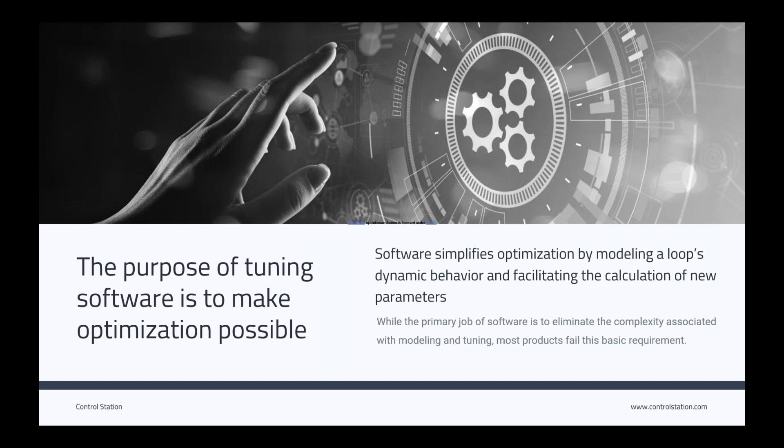Sure, Dennis. Morning, everybody. So I'm Brett Beauregard, I'm the Director of Product Development, and as Dennis said, I spend a lot of time working on steady state versus non-steady state and trying to make our products really be able to handle the difference.

So when we talk about steady state, mostly we're talking about what you would think of, right? We're talking about a calm ocean. Everything's moving comfortably and steadily, no major variations, maybe a few ripples here and there, but everything is calm. So the controller output is calm, the controller input is calm. We're not seeing any major upsets and things like that. There's an added stipulation, or an added kind of wrinkle that comes when we're talking about process dynamics.

So when we're modeling dynamics, changes, deviations from the norm, and things like that - one of the things that kind of misses sometimes, or one of the things that we include in our definition of steady state, is that we don't want to see changes in dynamics. So you were thinking of a calm ocean, but if you have something like a tank level that is steadily rising continuously, we would classify that as dynamically steady. That is a steady condition.

Everything is at equilibrium and calm. There's nothing different happening, knocking you around. That is a steady process dynamically.

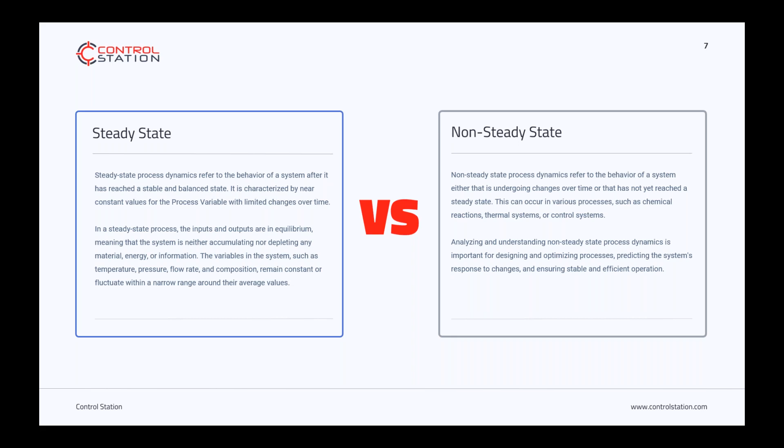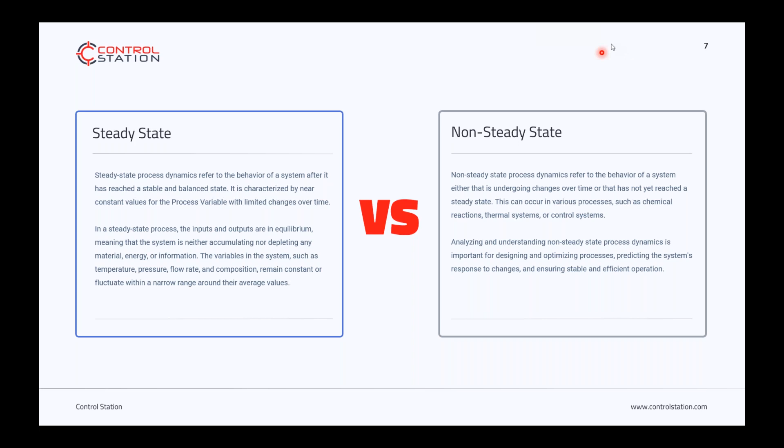Now, if you contrast that with non-steady state, also familiar to most people, here we're talking about a process undergoing a variety of changes. So it's not a calm ocean, it might be a storm. We have ripples occurring due to external impacts that are coming and changing us. We have ripples occurring due to set point changes and things where we've changed. We have ripples occurring due to load changes, and maybe even mechanical issues and things of that nature that are all causing our process to not be steady.

So when we say steady state or non-steady state, these are the differences, right? We're talking about a calm process dynamically, or a process that's got some motion into it. That's the difference we're trying to highlight when we're talking about these things in this presentation.

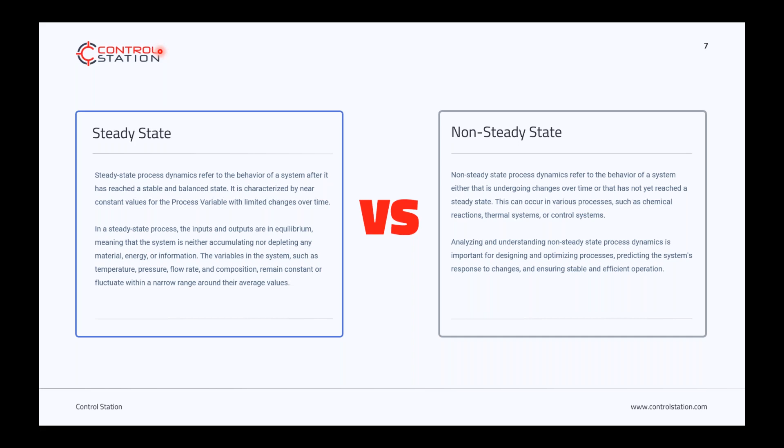Thanks, Brett. So as Brett just noted, today's webinar will focus on a common failing of controller tuning software products. We've entitled today's session Hijacked, as certain software vendors claim the ability to accurately model non-steady state process conditions. Their use of non-steady state as a feature only applies in the simplest of applications. To be blunt, their claim is intellectually dishonest. Most software packages fail to model and tune complex process conditions, what today's audience knows as the real world.

So how can practitioners in plant management determine if a tuning package is truly capable of handling those real world conditions? How do you know if an investment in software will provide the necessary value? How can you be sure that you too aren't being hijacked? Today we'll explore 3 separate questions or scenarios that provide clarification.

Our first question relates to integrating loops. These loops are exceptionally commonplace in industrial applications. Think of level control as an example, one that Brett mentioned earlier in his remarks. As it relates to non-steady state modeling, it's essential to know if the software can accurately model such a basic process using closed loop data.

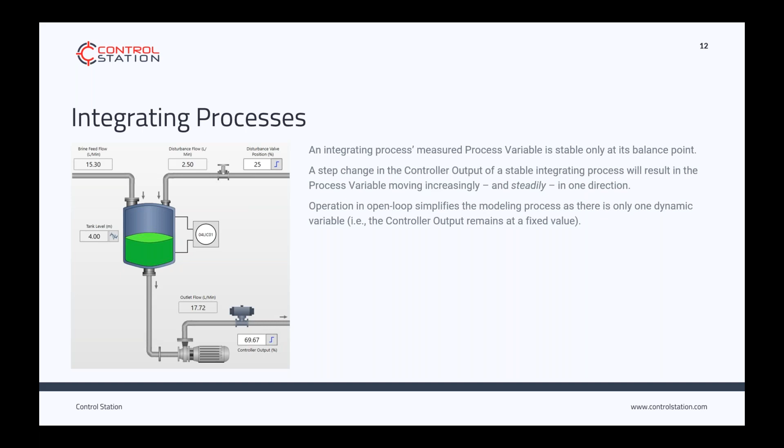So as an example here, if we move, we have one balance point where the flows are equal, but then if I increase the output, it may drain to the bottom, or if I decrease the output, it may raise to the top. So this, at first blush, and by a simple definition, you might consider this to not be steady state. This is kind of descent into zero. But here we have what I would consider, and by our definition, two different steady states where we have two dynamically steady points.

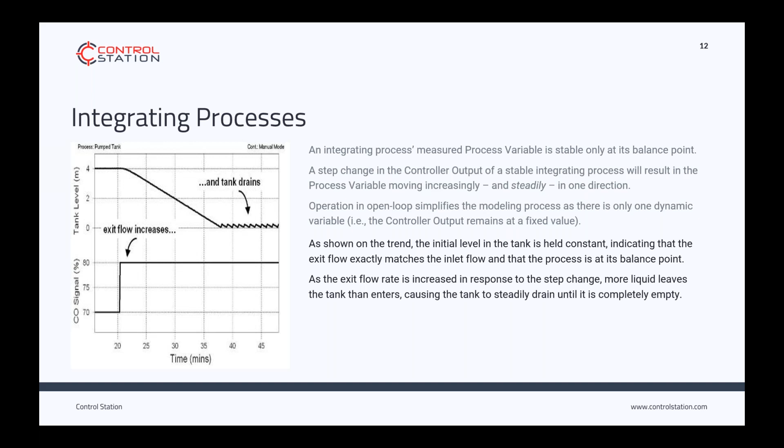I guess there's a third one at the end where we are steadily cavitating the pump for seven minutes, so hopefully the operator is getting disciplined for that. But this is an example of an integrating process.

So this is what some vendors would consider a non-steady state model, modeling this data. This is non-steady state data according to some vendors. And based on what we talked about a little earlier, I don't think we could say that this is a stormy ocean. This is a very calm sea, and we're just going in two different directions.

So dynamically, when we're talking about process dynamics, which is what we talk about when we're talking about process control, we have one steady state, another steady state, and you're doing the modeling of these behaviors. So this is a test and also an example of an integrating process. This is what some vendors would classify as a non-steady state test.

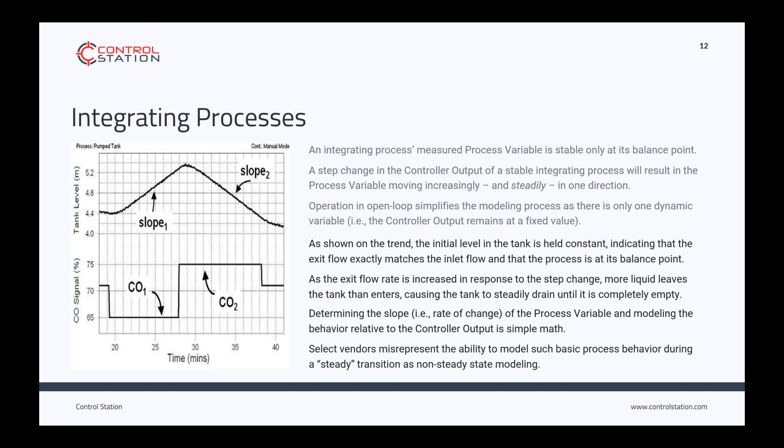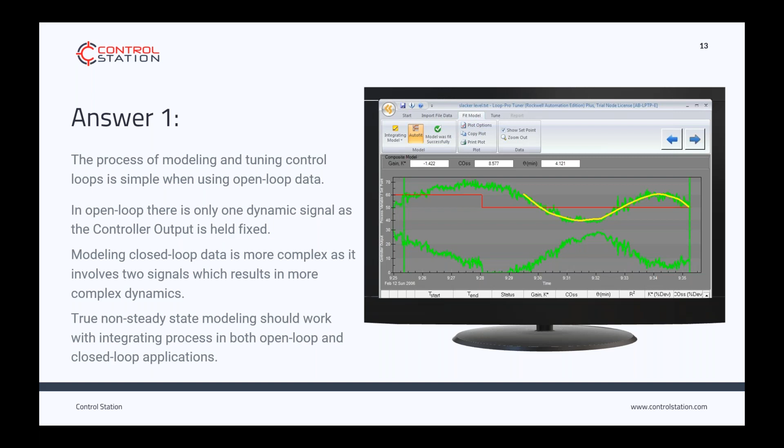So this is the first question, right? And this is the answer. Can your software model this closed loop integrating data? My guess would be that the answer is no, unless of course you're using our software already.

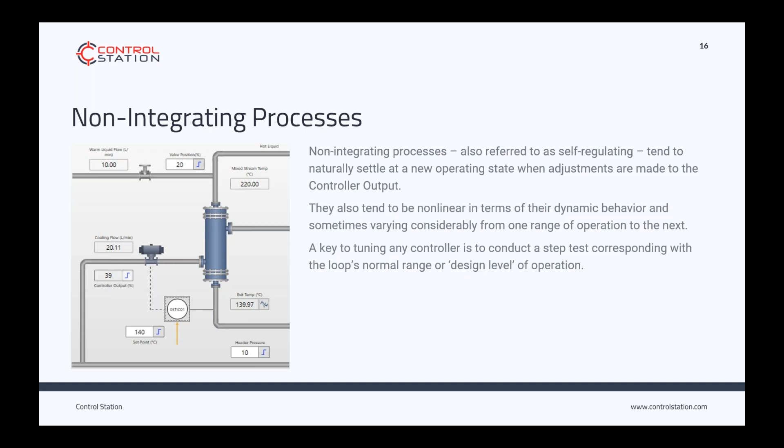So a heat exchanger is one example of this type of process, but it could also be a flow or most pressures. Even if you think of your car, it behaves in this way, right? We change the gas pedal angle and it changes. So this is probably the most simple test that you can perform.

So we have an open loop test. There's no controller in this. We make a step. We go from one steady state to another.

Most software products require that at least some of these conditions are met. So some of your lower end soft tuning packages will require that you can never be in automatic mode — you have to be in manual. Some require that you have to start and end at steady state, but also most importantly, all of them, other than the one that we're talking about here, ours, require that you start at steady state. So starting at steady state is a requirement of most software packages.

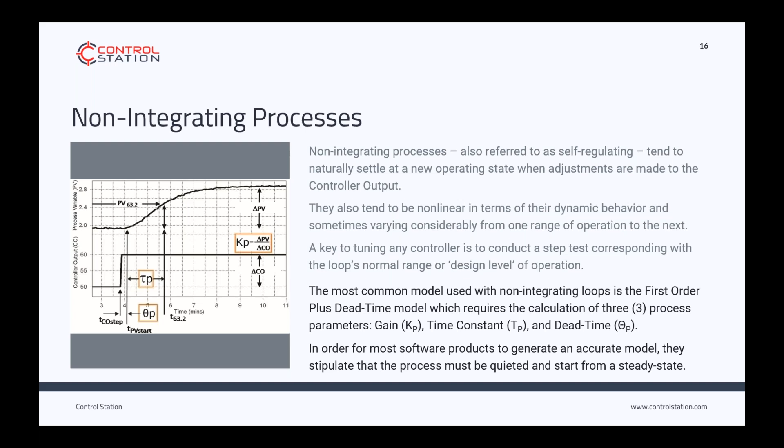By not requiring that the loop achieve a steady state before you do your test, it's much more likely that you will be able to do a test. Right? The joke is, if I could get it to steady state, I probably wouldn't need to tune it. That isn't always true, but that's the idea — okay, let's tune this loop, first thing we have to do is get it perfectly flat, and then we can start our test. That may be realistic in some cases, but it's much nicer if you can just say, all right, wherever the loop is right now, we can do a set point change. There's our data. Right? So there's many more opportunities for finding good data.

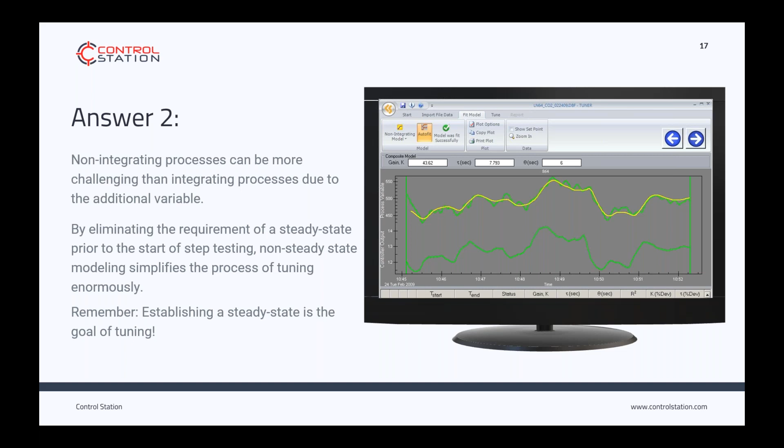Great input there, Brett. Which brings us to our third question. As shared at the beginning of today's session, oscillatory, noisy conditions are indeed the real world. Learning if a vendor's product can handle these commonplace conditions reveals the software's true worth.

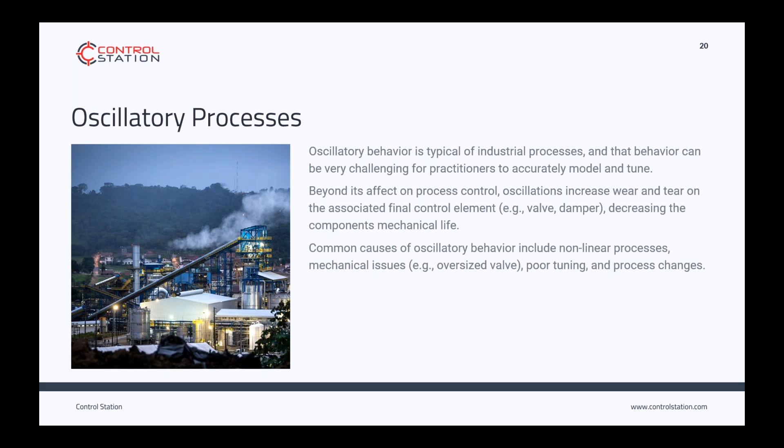But the fact of the matter is you really want to address these things, because unless, in the very, very rare case that they're related to the process itself, there are a few processes that actually require these dynamic changes, but almost always it's just a problem. It's increasing wear and tear on your equipment, causing variability in final product and things like that. So it's almost always something you want to get rid of.

And this is a challenge to tune. As I said, finding a good test is nearly impossible in automatic mode, and putting it in manual mode is not an option.

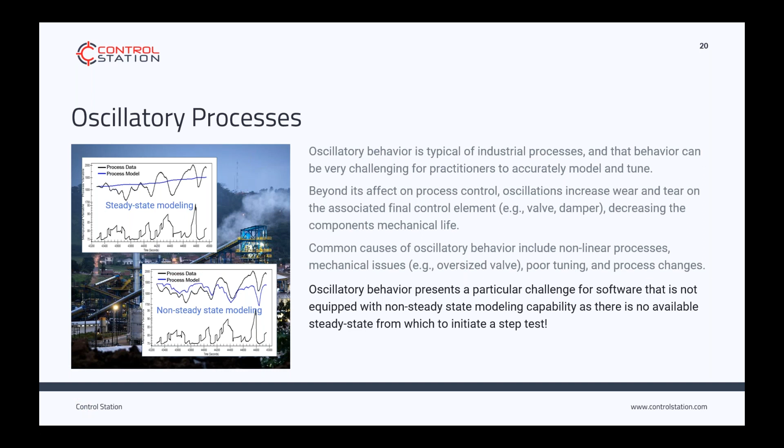Okay, so that's a good thing. If we contrast that with probably my favorite screenshot in the history of Control Station, I love this. It may look like it's fake, but this was a wonderful test, and it's not all that uncommon. This is just a screenshot I see every once in a while. Here we have oscillatory data. This is a temperature loop, I believe, in a boiler.

Frankly, what I think people expect from tuning software is that they can just put whatever data is coming from their process into the software and get results. This point is very poignant. It's the software's job to help you deal with these oscillations, not your job to smooth everything out so the software can help you a little. If they can do this job, it makes your life much easier, at least in this respect. I think there's still a lot of stuff you'll have to deal with, but hopefully tuning isn't the problem.

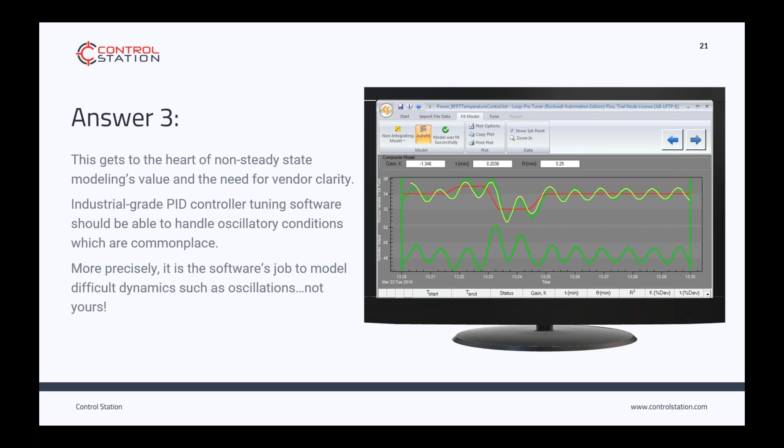That's usually not a claim other software packages will make, because they don't have that capability - there's not a way to get a manual test that looks non-steady. So can it handle that? And then, for the gold standard: can it just handle full-on oscillatory data fed into this model fitter? Can it deal with it? Can it give you the numbers you need without you needing to baby it in a variety of different ways? Dennis?

Great remarks there, Brett. And thanks for summarizing. Control Station has been in the business of developing PID control tuning software since the late 80s. Based on our experience, we've compiled a list of features that practitioners regularly request. We're going to show some of those here on the screen.

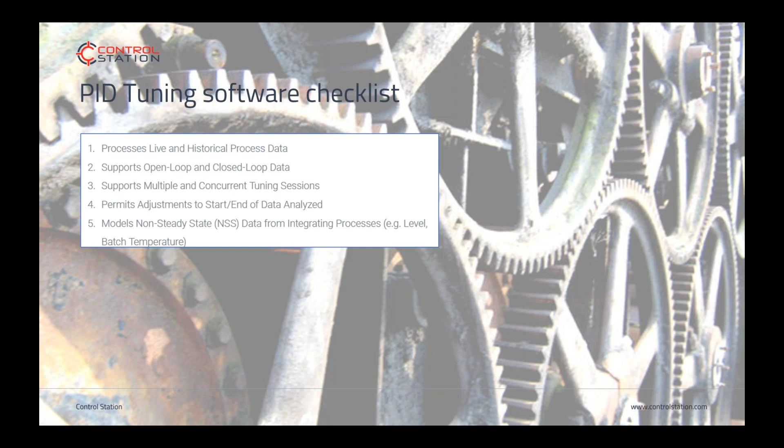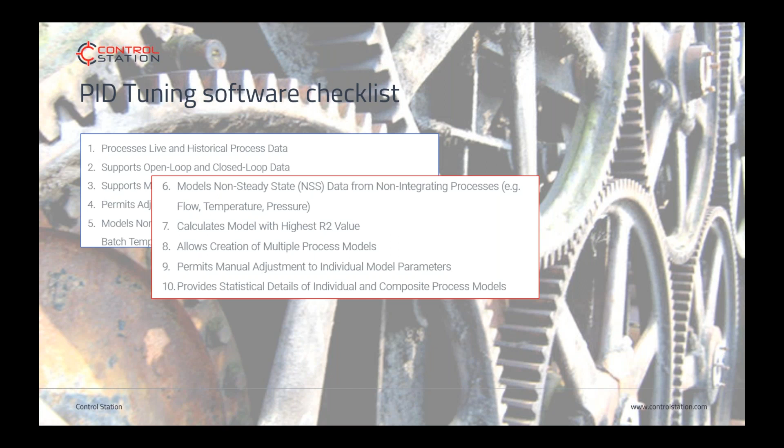While it's key to have the ability to handle non-steady state conditions of integrating loops, it's also key that software support both live and historical data - that's a common need in industrial applications. Like integrating loops, the ability to accurately model non-integrating loops is just as important, along with the ability to support multi-loop applications - think of Cascade. Also, the availability of statistical data can be key to effective decision making while tuning PID control loops.

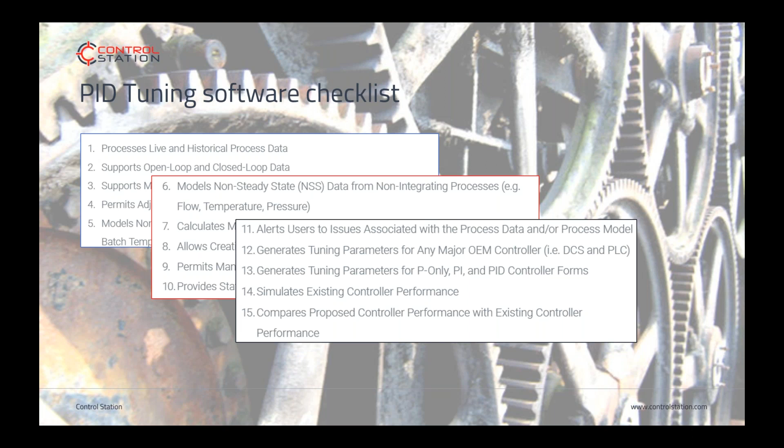Other functions, such as alerting users to issues with data and/or modeling, can be key to avoiding bad decisions while tuning. So too is the simulation of recommended tunings, so that you can contrast existing versus recommended tuning performance before implementing. Lastly, from our list, capabilities such as keeping a log of past tuning sessions, as well as generating detailed reports, can help users understand how dynamic behavior changes over time and how they may need to address variability issues using methods aside from PID tuning.

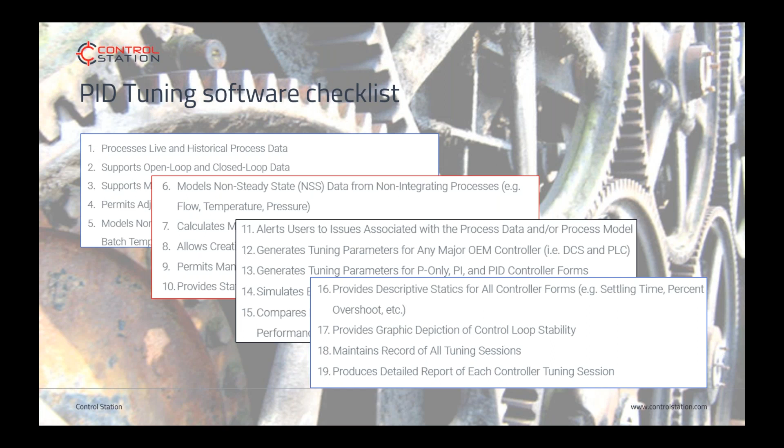So here we are with a quick summary of today's webinar. We started with the premise that the advent of PID tuning software was to make the process of tuning control loops simple - first by automating the process and standardizing those repeatable tasks, but also by performing the difficult function of modeling highly dynamic process conditions. That was the purpose of PID tuning software.

Since the beginning of PID tuning software in the marketplace, nearly all commercial tuning tools have failed the customer's requirements. And that's because they force users to, in Brett's terminology, quiet a process before the software will actually work. It's our belief that that's counterintuitive. With the introduction of non-steady state modeling innovation back in 2009, certain software vendors, including Control Station, have claimed the ability to model non-steady state. But with the exception of Control Station, we believe that's simply a misleading claim.